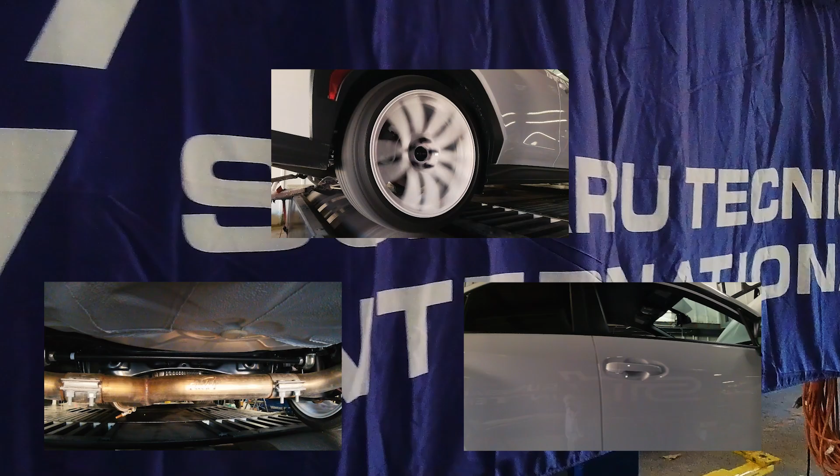Right now Adam is calibrating the dyno, and once he's done, he's going to run a base map. This is actually the Cobb OTS simulated stock, so it should make pretty much the same power as the stock car, giving us a good baseline of where we started.

I'm really excited because this is something I've seen since the cars came out. A lot of people have argued about exactly how much wheel horsepower it makes compared to the 271 to the crank that Subaru claims. Guess we're going to find out.

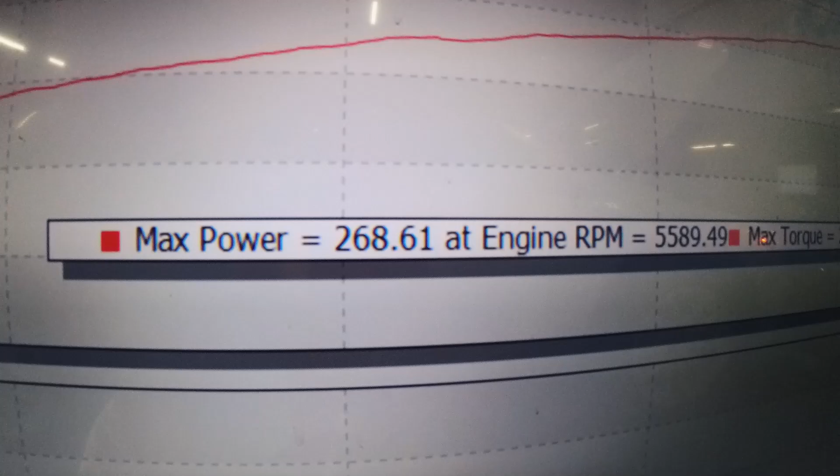Alright guys, so you just saw the first pull, and here we go. Pretty much what everybody else has been getting: 268 horsepower, 267 torque. I mean, you tell me.

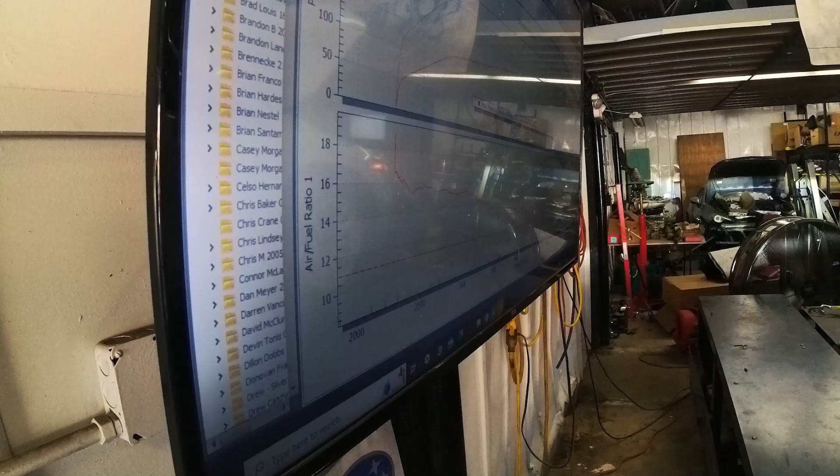Subaru is saying that to the crank, this car makes 271. There's no way. There's no way this car makes 271 to the crank. So clearly, they're pulling the Volkswagen on us.

So the dyno is a Dynojet, and I know you guys have seen tons of these dyno graphs all over the internet. The biggest question has been, if it makes 271 to the crank, it can't make 250, 260 to the wheel. Well, there you go. I'm like the five millionth person to dyno a WRX to show you what a stock one makes.

Now whenever I post these races against STIs, it hurts the egos of all the people that have STIs. They come and say, oh, it's only 3 more horsepower than before, it's nowhere near as fast, and on paper it doesn't look that fast.

But with the way the power is, the way the power band is, and the way the new transmission is, having closer gears, it makes a massive difference. Yes, one particular piece of data you look at may not tell the full story, but as a package, that's what matters.

Nobody ever just looks at a car and says, oh, that engine is great, so the car is great. Everything needs to work together. I think for the first time in some time, at least since the 2015 WRXs, it drives incredibly well.

And I'm glad that's the number that came up, because that's exactly what I felt like when I was racing my friend's STI a couple months back. His was stock, mine was stock, and I have a shootout for it.

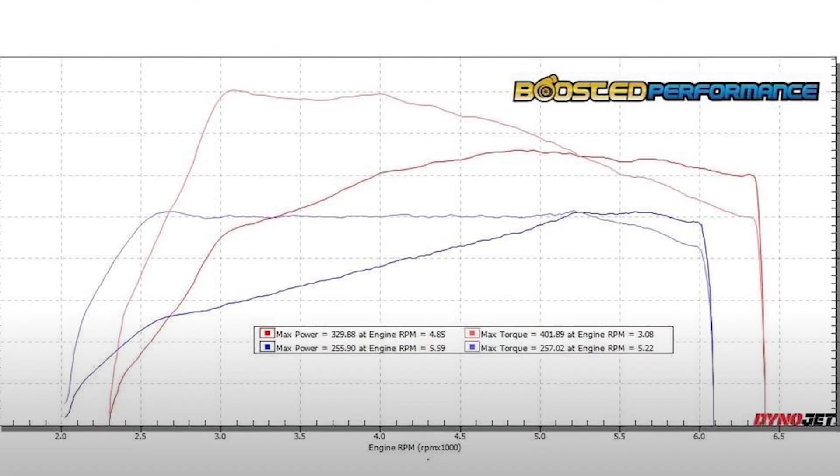So what he's doing now is loading up. Graham is the tuner, over at Boosted Performance in Iowa. You guys have seen his video, or Subi Speed's video, where they took his WRX and he made great power—I think he was touching about 400 torque, which is pretty high. So Adam is sending the base map over to Graham, who's going to fiddle around with it, and they're going to throw on their stage 1 and we'll see what it makes. This is the part where it gets exciting.

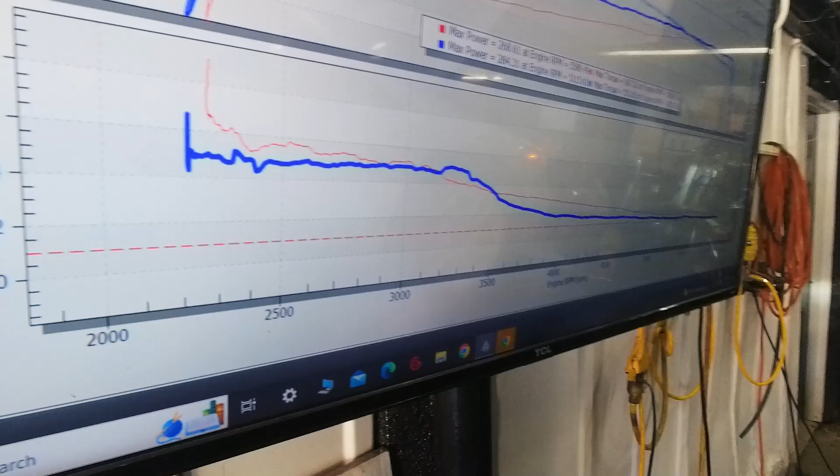Guys, this was just stage 1. I want you to take a look at those numbers: 281, 351. That's ridiculous. At 19 pounds, that is crazy.

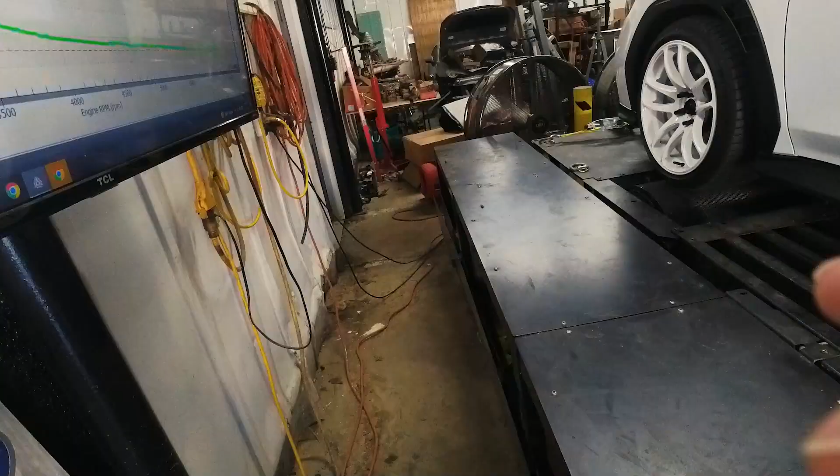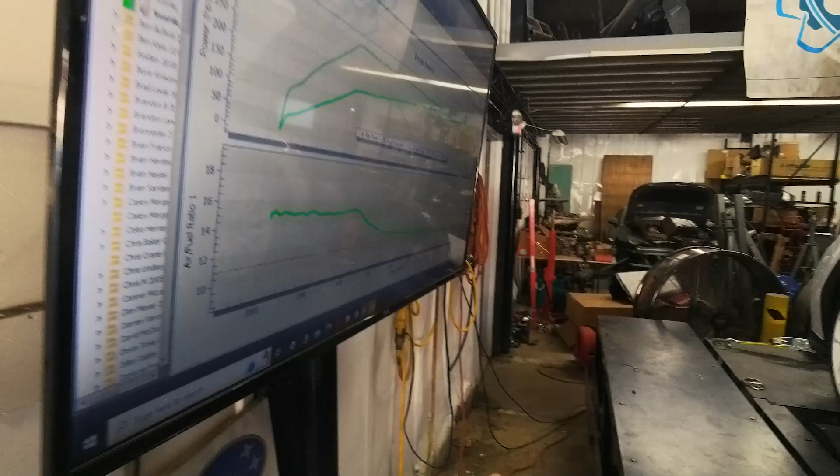All right guys, this is where we're at right now—289 horsepower and 351 torque. We're actually going to get the intake on there now, and then we'll start this process again with just 93. And then after that, E40, baby. That's when we're going to make some big, big bucks.

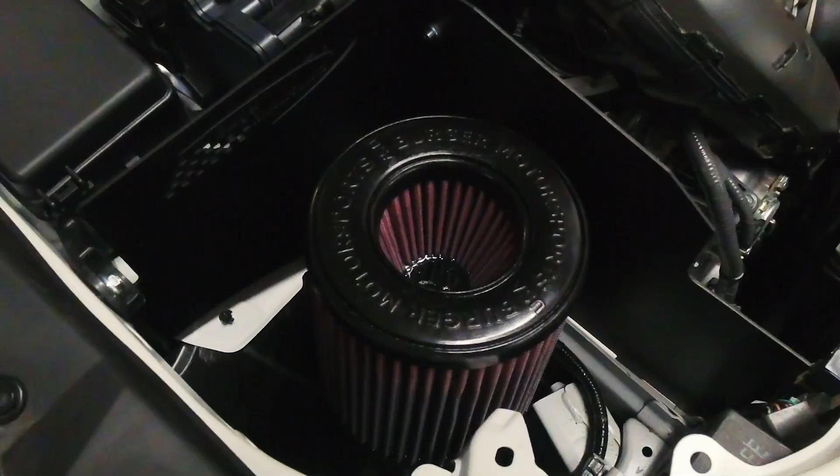All right guys, just an update. The intake is on the car. We just got another map for the intake, and we're doing a quick idle, not a run, just to make sure everything looks okay. Once we get the okay from the tuner, next pull is going to be the first pull with 93 with the intake on. I'm telling you, I'm very excited. I've heard that the J-pipe does help, but the intake is a big sticking point for this car, and you can make a decent amount of power, so I'm really looking forward to it.

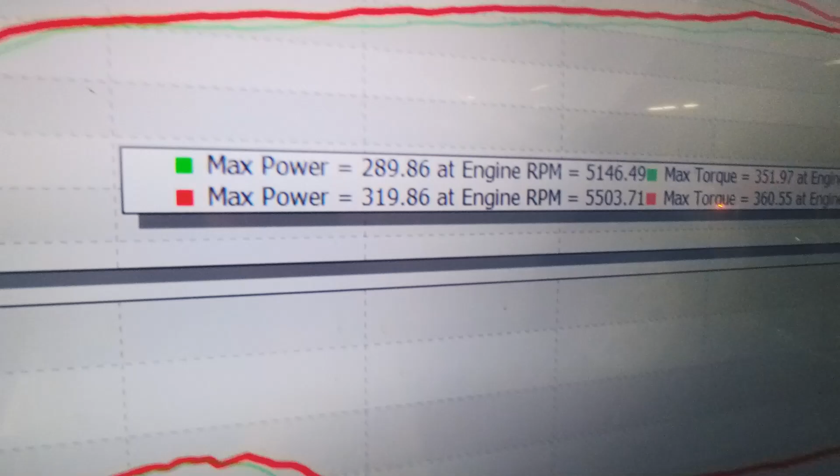All right guys, first run with the intake. Check that out—319 horsepower and 360 torque. That is a big jump.

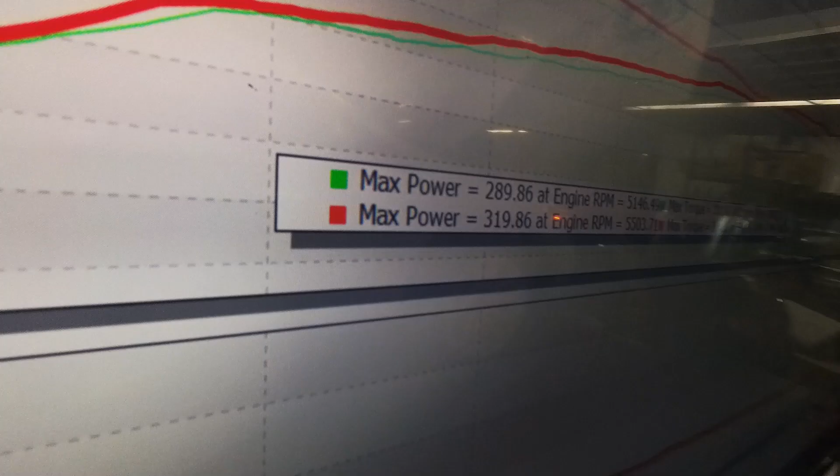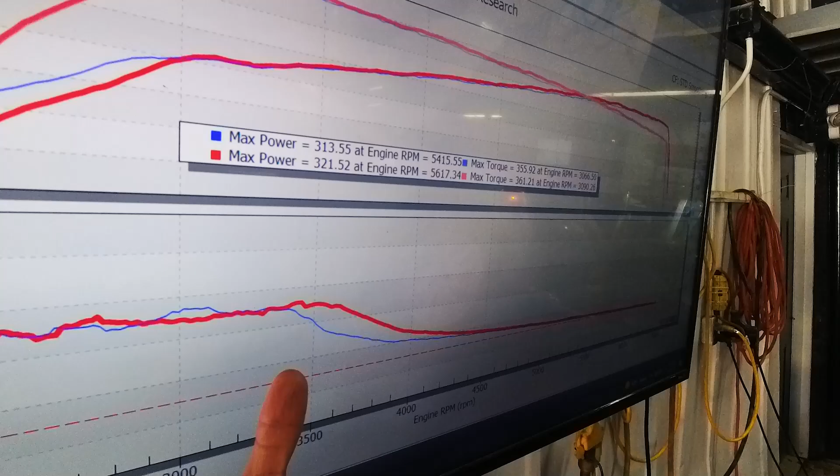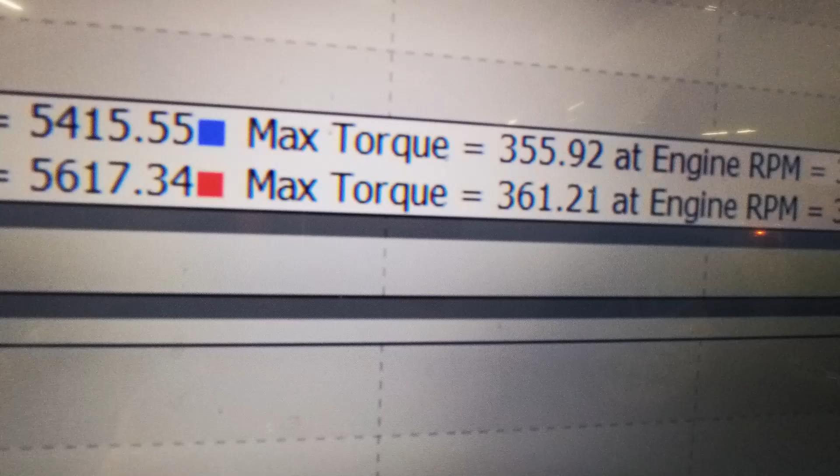Oh wow. That's officially more than, yeah. So we got 321.52 and 361.21. That is fantastic. And we're still on 93, but with just the intake.

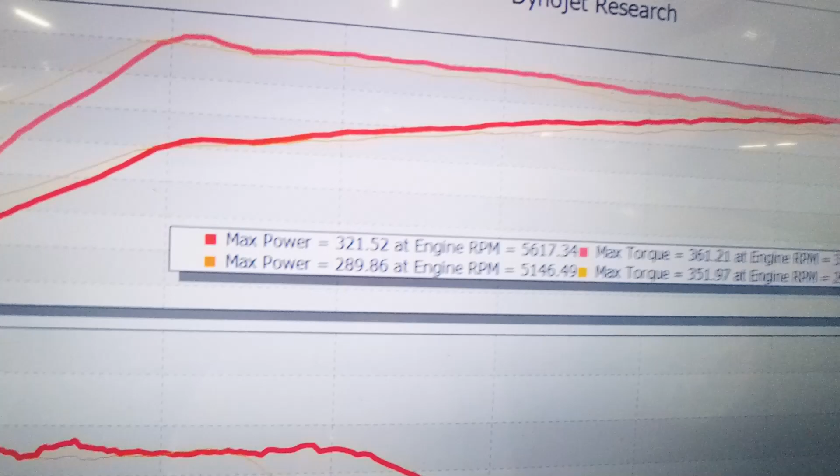All right guys, so here's where we're at. This is going to be the starting point: 321 horsepower, 361 torque. This is our kickoff point for ethanol.

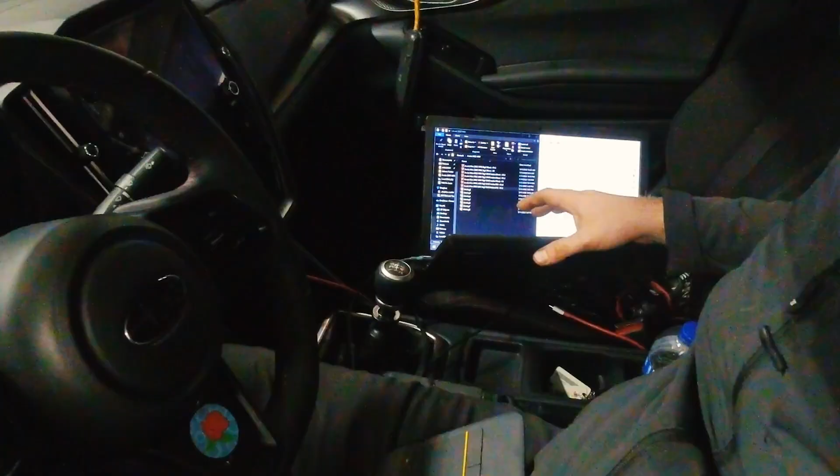Just another update. Ethanol is in, everything is good, the ethanol tune is on the car. The next run we're going to do is going to be the first E40 run that we do today. Adam and I have been talking—we're very excited. We think maybe the torque won't go up as much as we want or as much as we think, but we really think the horsepower is going to jump up a decent amount as we work through this tune. So I'm going to set up the camera and let's watch this next run.

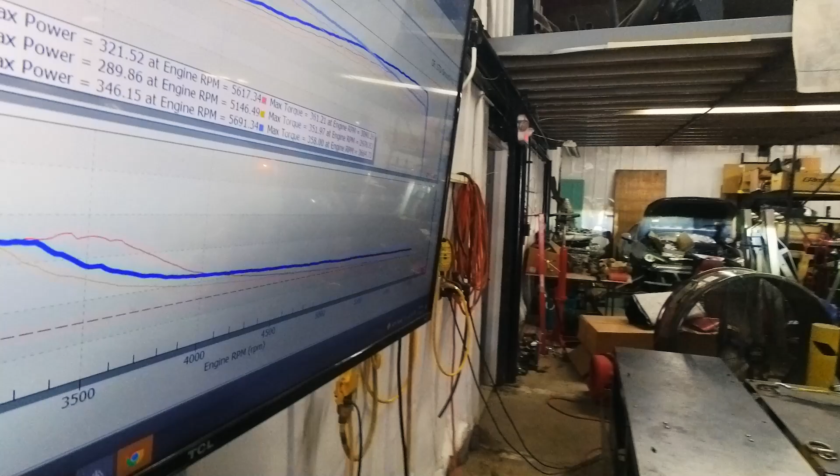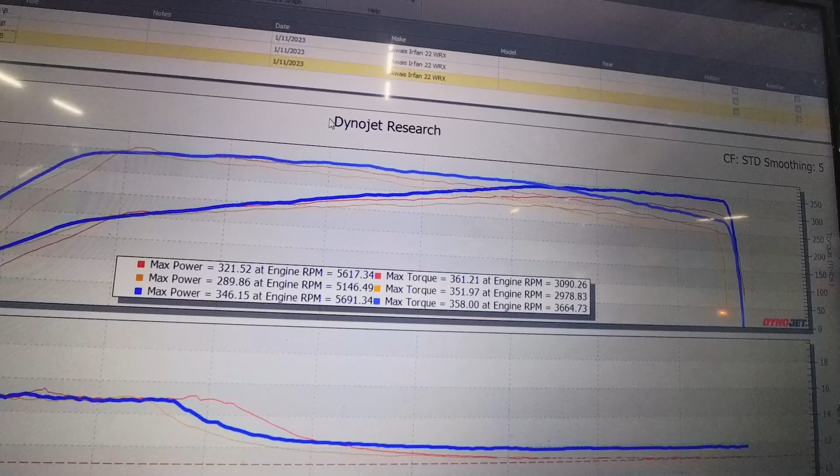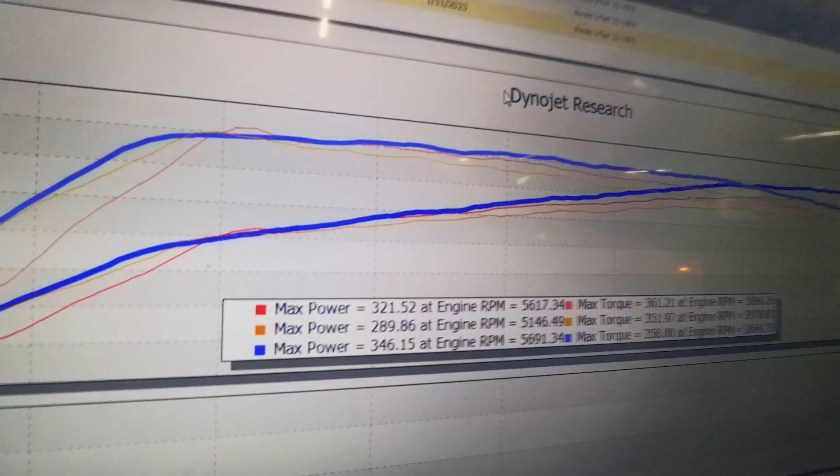All right, first ethanol run, let's see what we got. Damn. Wow, dude, that is crazy. That is amazing. So first run is 346 and 358 on the torque, but look at this line—it's just fantastic, it's really good.

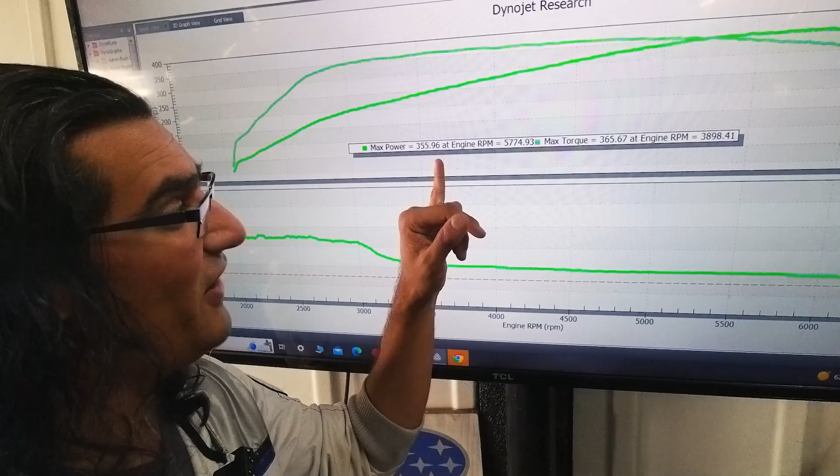For some reason—well, not for some reason, I forgot to turn the mic on—but you can see we just hit 355 and 367, or 365 torque. The car is loving everything that we're giving it. I have no idea where we're going to stop.

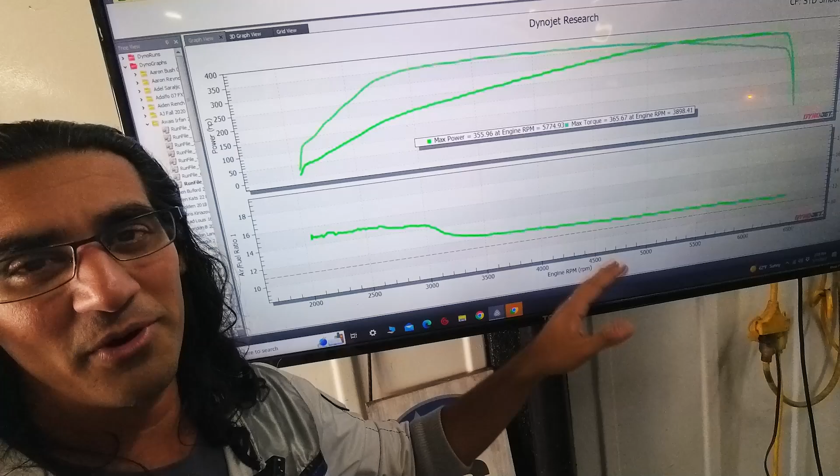What do you think, about 600? One day, yeah. All we'll have to do is upgrade one part and they'll probably do it.

The car's running great, it sounds great, especially in this cavernous area. I still can't wait till we get a J-pipe to really get some pops, but even right now it is making incredible noise. We're going to keep going and let's see how high we get.

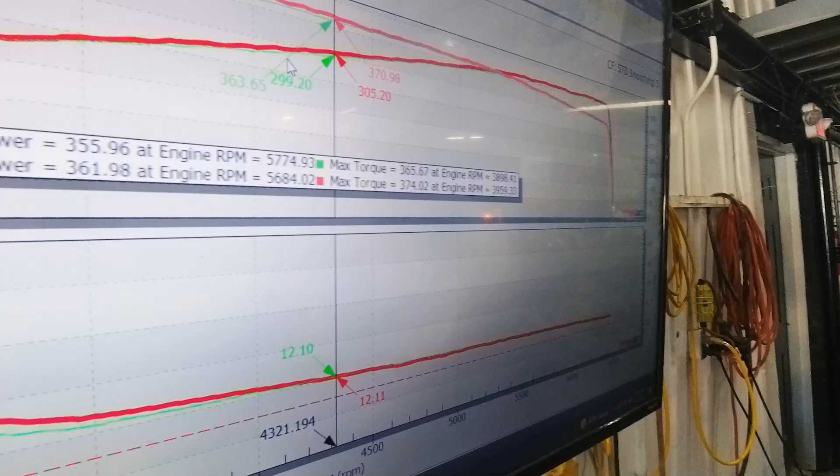All right, let's see where we're at. Damn, look at that—361, 374 torque. Pretty majestic, that is nice.

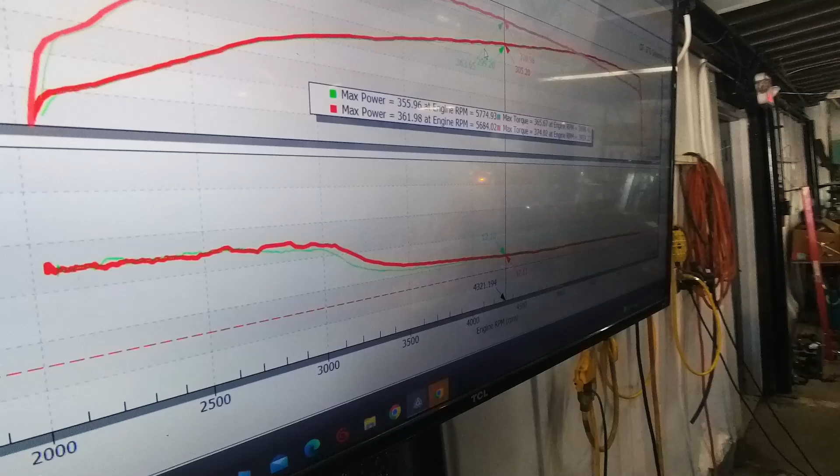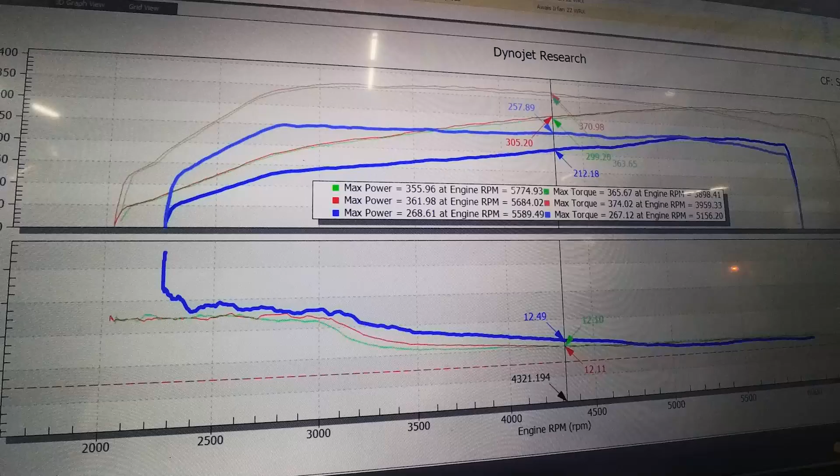Again, all from an intake and ethanol, that's it. And you went from what was 268, 251? 268, 258? So this was the OEM. Yeah, look at the OEM map—268, 267 is where we started. That is incredible. Yeah, it's quite nice.

Graham's first revision, and that one did 289, 351—that was just the first revision with 93 alone, no intake. And then we moved on.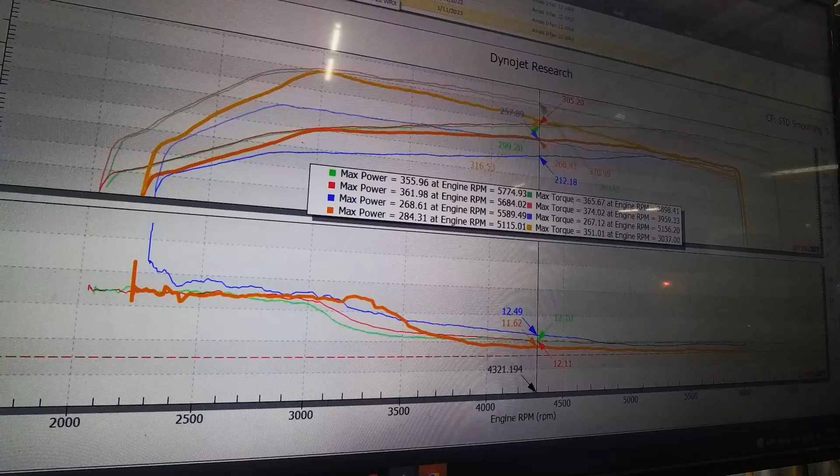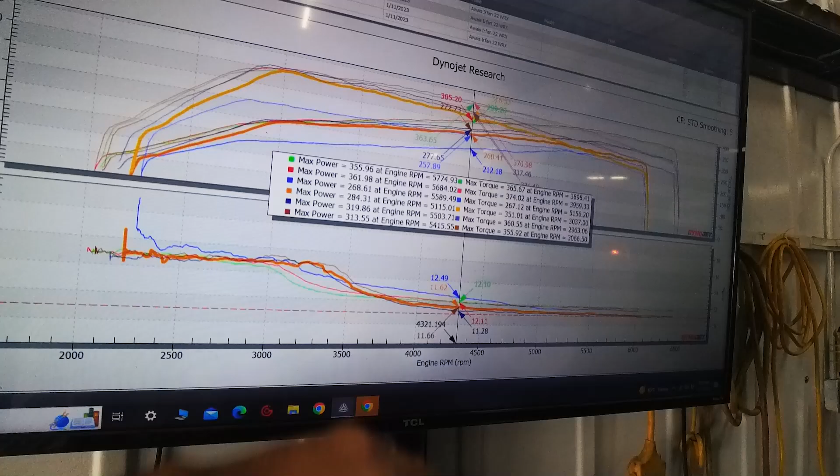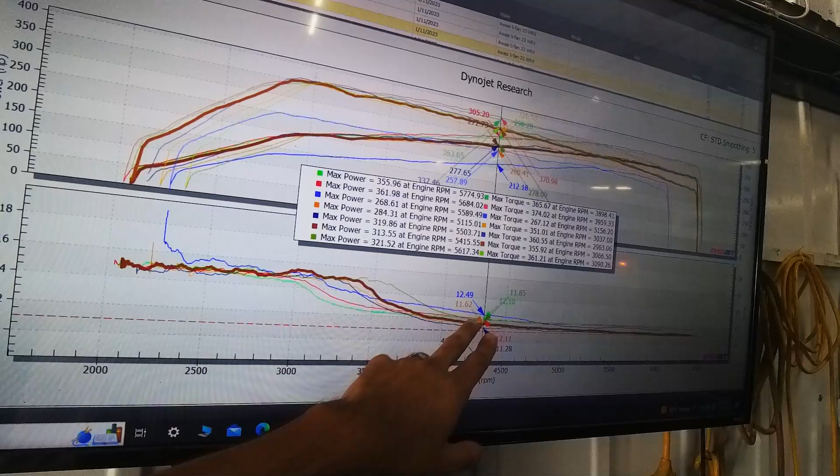I think I'm going to go a couple ahead of that—that was the second last, right? The 319 was the second last we did on ethanol. Correct. And then 313, I believe, is what we left it at. No, it was 321—oh that's right, it was 321, 360. Yeah, 321, 361 is where we started before ethanol. Right, that was our final pump map.

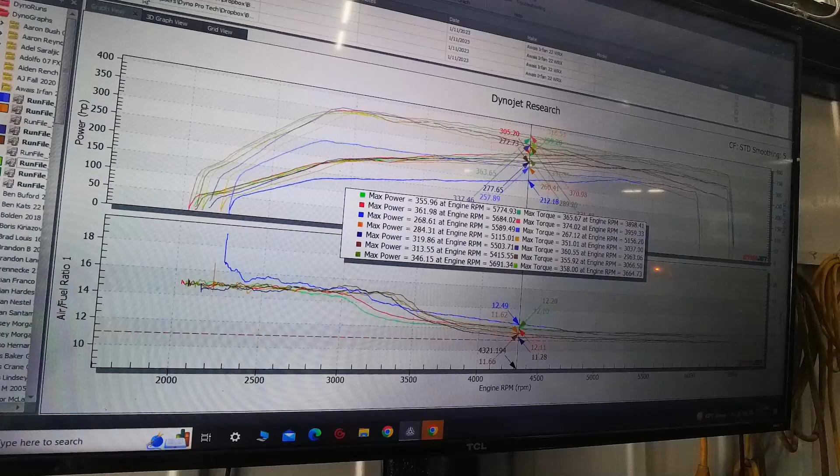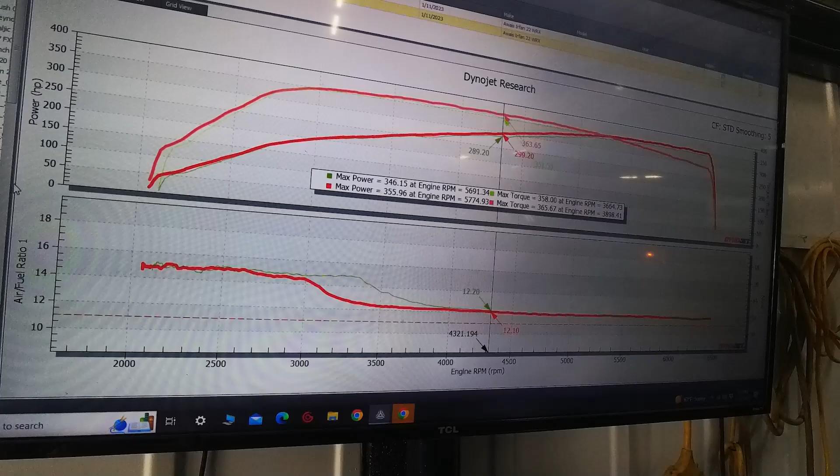That is incredible. This is confusing, it was all but that. Yeah, the first ethanol, second ethanol, third ethanol. You can see each revision we went up about 10 horsepower. That's really good, nice little jumps. Especially the torque, pretty much about even, they both went up about 10-ish each time. That is very nice.

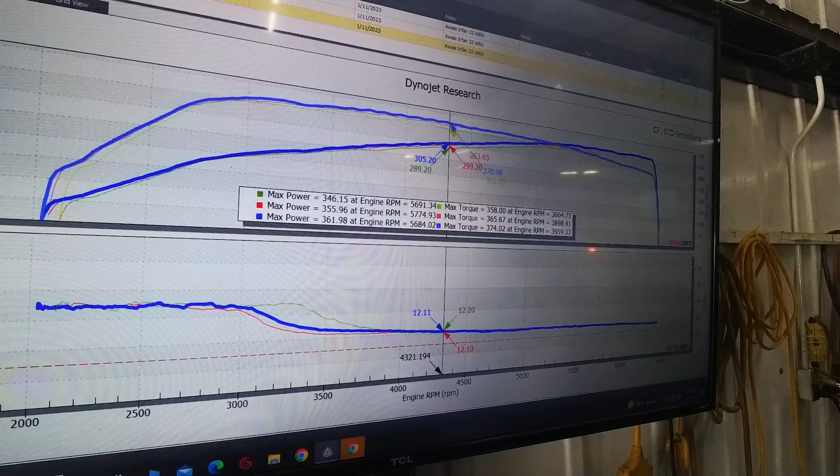And you're saying with a J-pipe, we're looking at about another 20 on top of that. So with a J-pipe, yeah, we'll be at 380, 400. Easy. All right, so this is it.

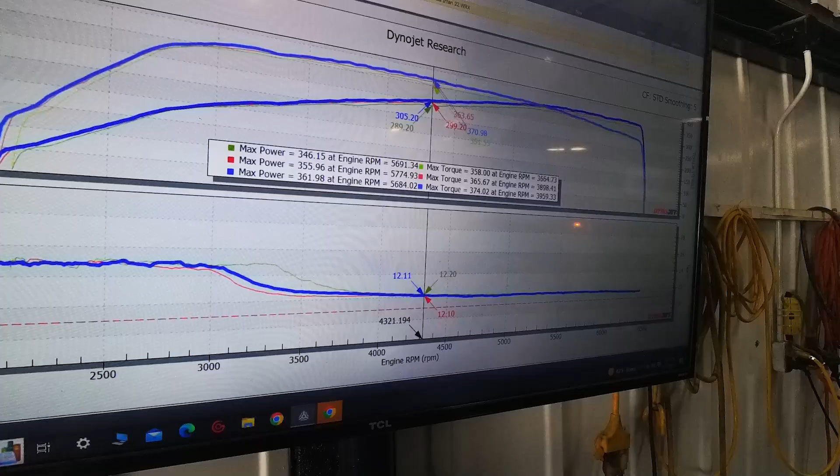361, 374 is what it's making. That is incredible, everything looks good. Graham says everything looks fantastic. This is where we're going to end it. Now remember, this is intake and ethanol only.

J-pipe's not ready yet. We'll come back in a couple of weeks for the J-pipe, and they're projecting another 20-30 horsepower, and another 20-30 torque with the J-pipe. So yeah, potentially much closer to 400.

So we're going to get the car off and go take it for a ride, and we are very, very excited to see what this feels like. I will set up the camera so you guys can see our impressions once we get out there. So we're going to get the car down, but what I wanted to do was actually have Adam explain some of the things that he saw, because it was very interesting.

Now, as a non-tuner, non-mechanic, these kind of went over my head, but I did notice some things like the DAM, which I'm going to let him explain now.

So when we did the very first baseline run on the OTS Stage 0 map, which is like a simulated stock map, I saw DAM began at 0.688, which is a typical Subaru strategy on ignition timing. It's to work the DAM up. But it didn't really move much until I got into boost, which is, again, typical. And at that point, at boost, I saw 0.812, which means about 2 or 3 runs and DAM should be up at around 1 without much knock, if any, on the stock tune.

I did see a little knock on the stock tune, but we didn't make much power. It was pretty flat torque curve. We made around 265, 268. Yeah, and then we moved on to doing a tune with the stock intake, and it really woke the car up with a little bit more boost and a little bit more timing as well.